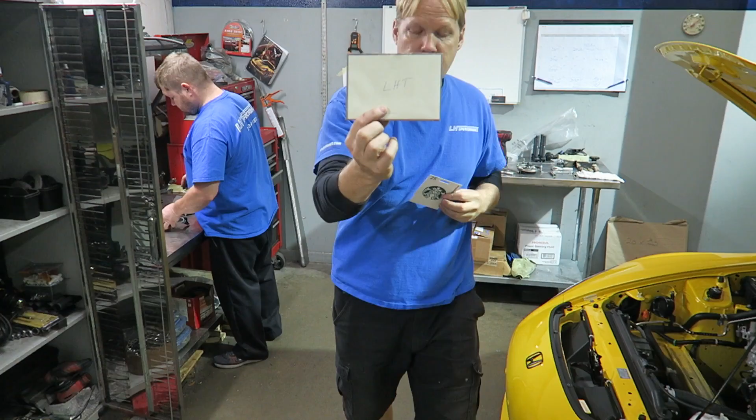Alright, so when Keith dropped off his car, he also dropped off this, which had this in it. Fantastic. George, you're going to be forced to drink a Starbucks coffee. Thank you, Keith.

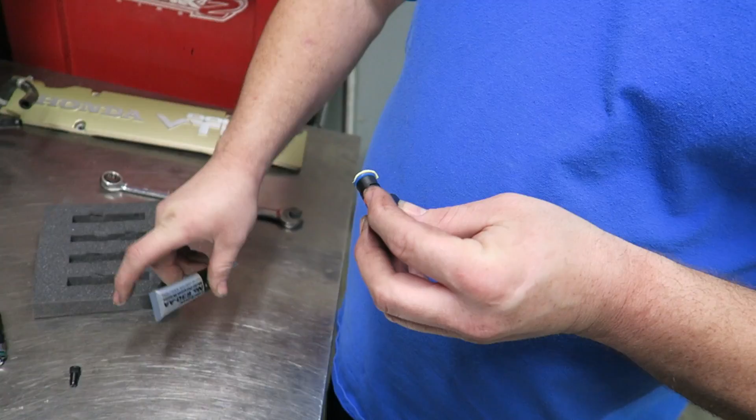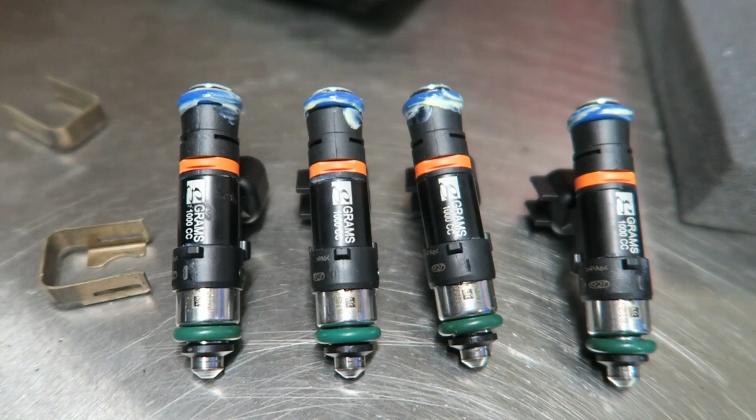Over on George's bench right now, a little bit of lube on the O-rings to make them go in nice and not scratch or kink or anything like that. This is the 06-and-up fuel rail. This is the S2000 CR, but most of the components are the same as the 06-and-up. This is a returnless system, we've talked about this before. Typically 420, 430 horsepower is all it supports before it starts becoming restrictive. These are the Grams 1000cc injectors we use on all of our kits. Great injectors, great idle, very easy to tune.

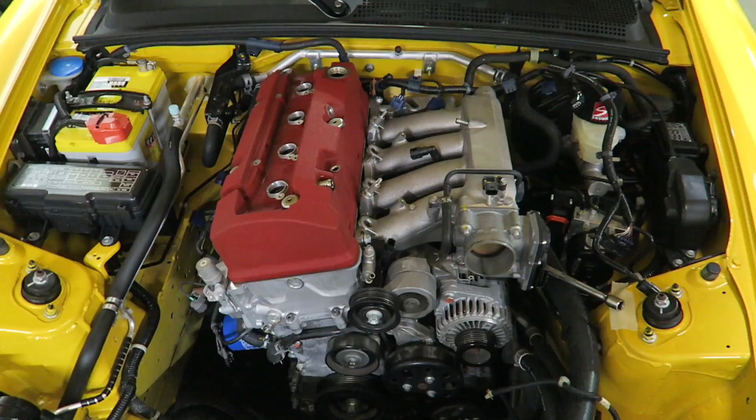So here we are at this point, still taking things apart. He's putting the injectors in the rail. This manifold is getting changed, he's actually getting one of our updated manifolds. It's the larger manifold, basically the plenum is about 35% larger. The runners are pretty much the same, except we ported them out, and then the entryways we opened up to make them larger. They should be back today.

He wanted it powder coated and wrinkle black, so when it comes in I'll go ahead and film that and show you some of the parts.

What are you writing? Prices. You booking people in? I'm trying, I'm really trying. So if you can't get a hold of us on the phone, it's because Esther's not answering it. See, it's always good to blame someone else. It's not my fault, she's trying.

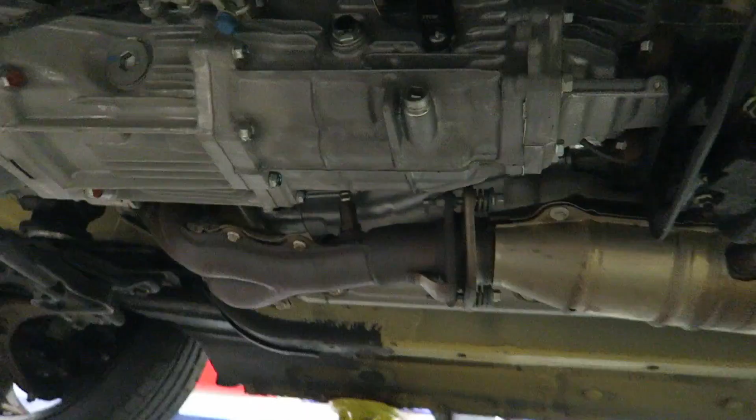She's booking people in. We're booking up pretty quick, but by having a schedule, that lets everybody's car come in and get worked on that day. We're not a shop where you drop it off outside and we work on it whenever, that doesn't happen. The car was actually driven all the way from Texas, so we've been doing the other little jobs while it cools down because it's actually fairly warm still.

But the transmission has to come off to do the clutch. He's opting for one of our flywheels too.

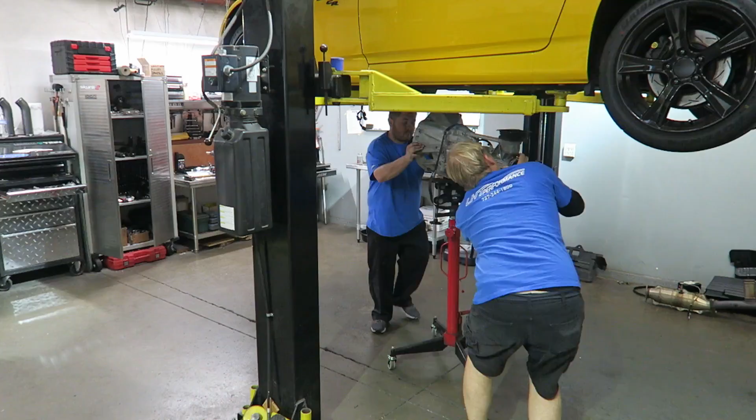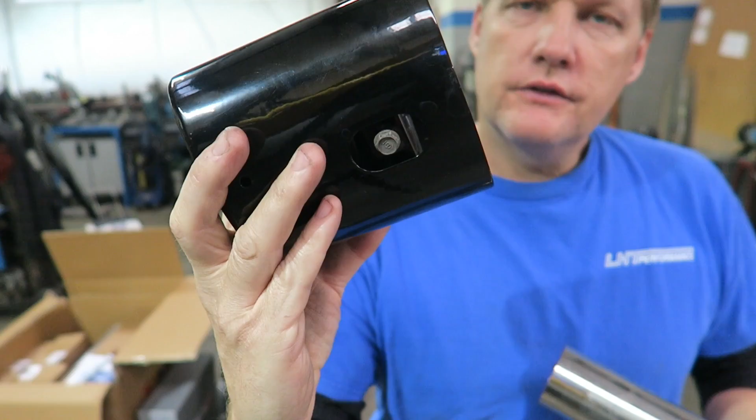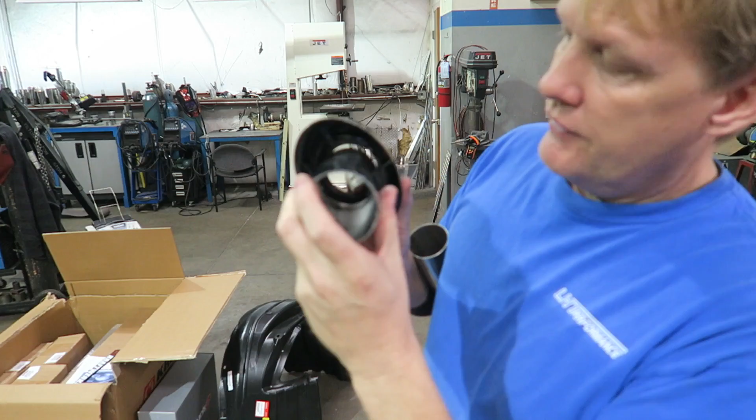So the CR has black exhaust tips and the customer really wants to keep these. We're doing our LHT twin loop muffler, and the way this clamps on is it slides into this area here, and then there's a little bolt that goes through that the exhaust has a tab the bolt goes through. Now this is 2.5 inch, and our exhaust is 2 3/4 into dual 2.5s, and 2.5s don't fit in there at all, it's not going to happen. This is our next size down, 2 1/4.

This is too small. We could weld a tab on there, but the problem is vibration, this tip would end up doing whatever it wants and it would be crooked, and then it would look goofy. You'd see a car going down the road and one tip's like this, one tip's like that. That ain't gonna happen. So what I'm gonna do is take the 2.5, cut it down. I'm actually gonna split it and then neck it down to the exact size, then weld up the seam. You're not gonna see it because it's inside this tip. But again, it's something the customer really wanted, so we're gonna try and make it happen for him.

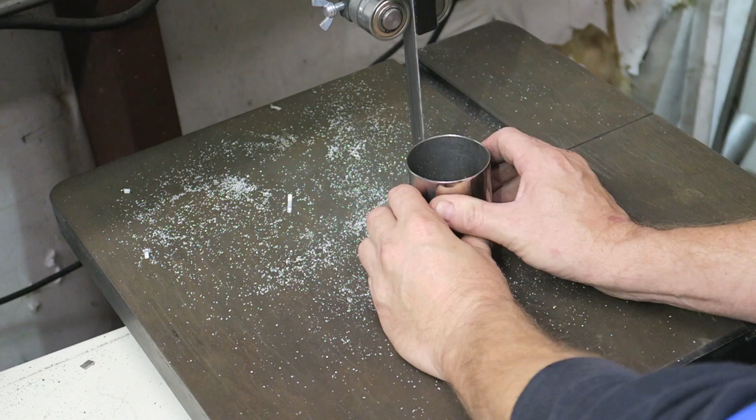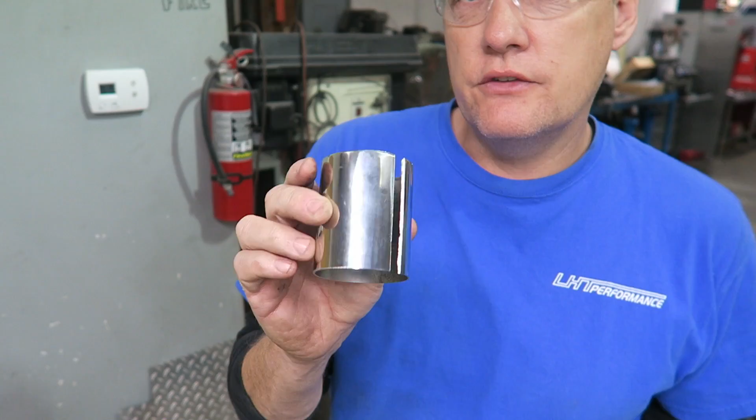So now, using a quick calculation with the pi equation, we took this much out of it. We're going to pinch that down in the vise. Hopefully it'll be round here by that.

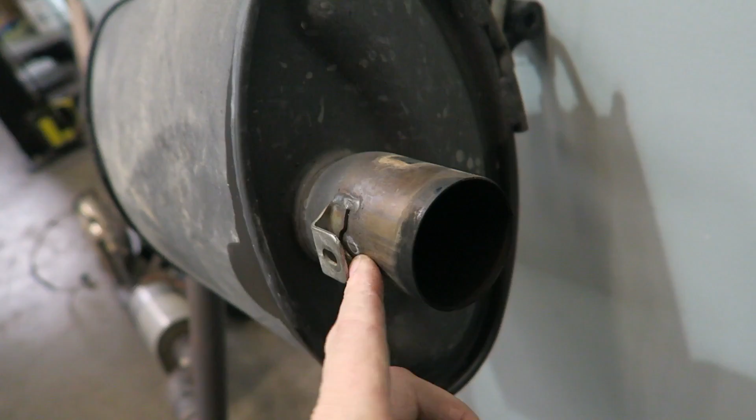Perfect. So this is the little tab that sits off where the muffler bolts to. The muffler slides over that, the bolt goes through here and attaches to a nut that's welded inside the tip. So basically we need to recreate one of those.

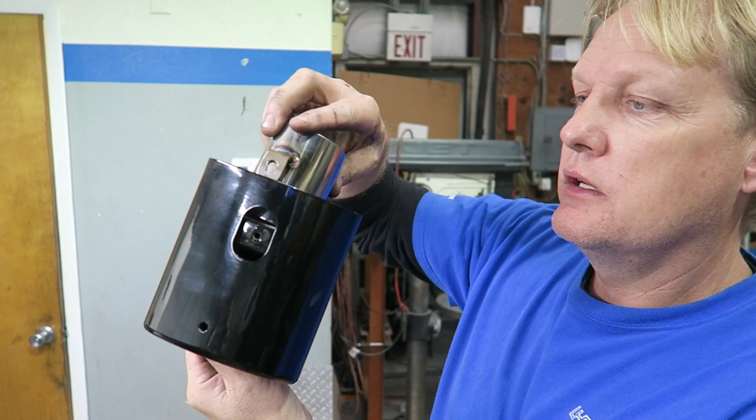There's a piece welded on, and I slotted it just like the Honda piece, so it has a little bit of wiggle room. This goes on, that slides in here, that fits on, and the bolt goes back in.

If you buy from us, we put this finish on it and also install the bearing, which makes it a little easier. If you buy our Clutch Masters clutch and flywheel combo, we put them together in one box and ship them for free, saving you a lot of hassle. You're ready to go with the right combination. That's the same combination we use on almost every single S2000 that leaves the shop.

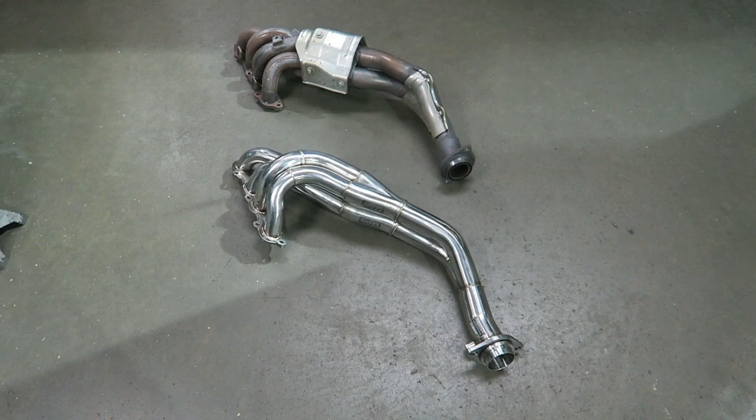You know, I thought about it - we have that digital fishing scale here. Why not weigh it? Maybe it's lighter than the factory one too. Let's get a before and after. We'll put this on too because this is going to be on there if you're running it.

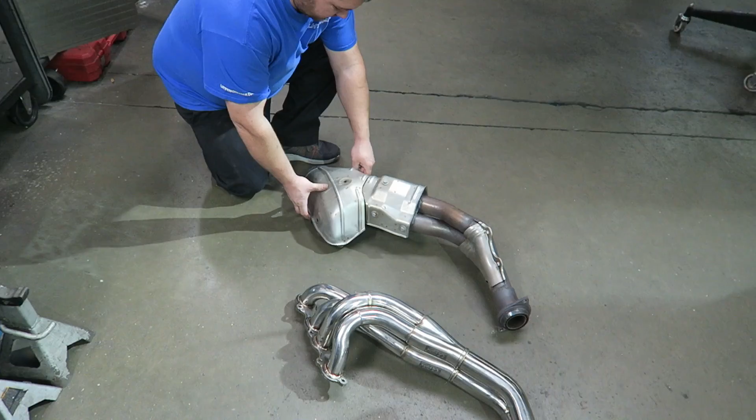That's true. All right, factory header in factory configuration. Weight test number one.

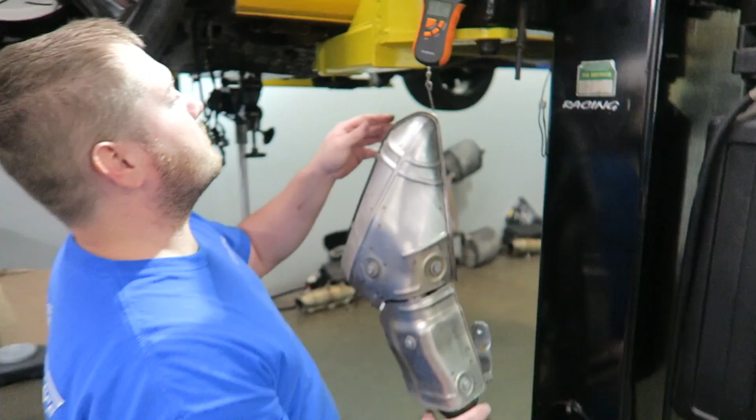Let's see what we got. What do we got, George? Still moving - we'll just call that 23 pounds 13 ounces. Yeah, 23, 13. All right, Skunk2 header.

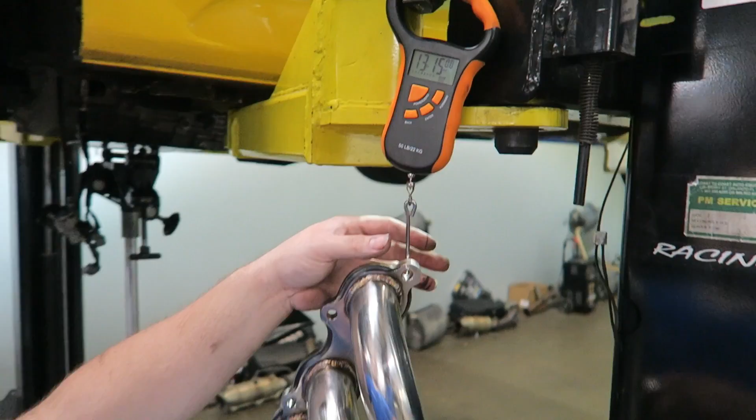Let's see where we are. What are we looking at? 13 pounds 15 ounces. Wow, look at that, I didn't expect that, did you? No. We were at 23, 13 and now 13 pounds - that's a 10 pound difference.

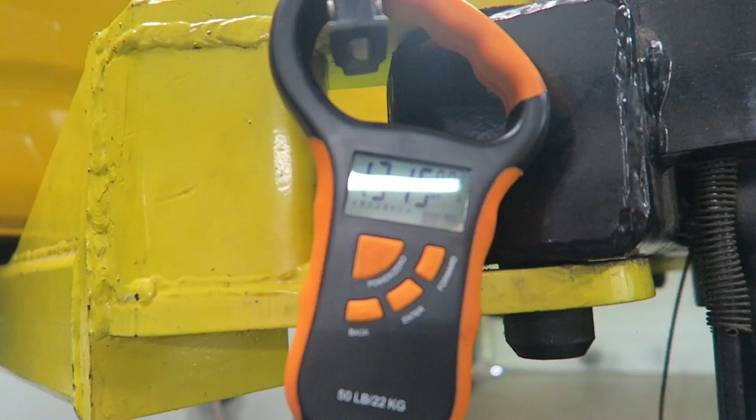Oh, he's got the red valve cover, factory. I've got everything pretty much off of there, ready to come off. And there's the black valve cover installed. I really prefer the black, especially on the yellow car - I don't really like the red and yellow together. But then again, every S2000 has a red valve cover, so why not change it up a little bit?

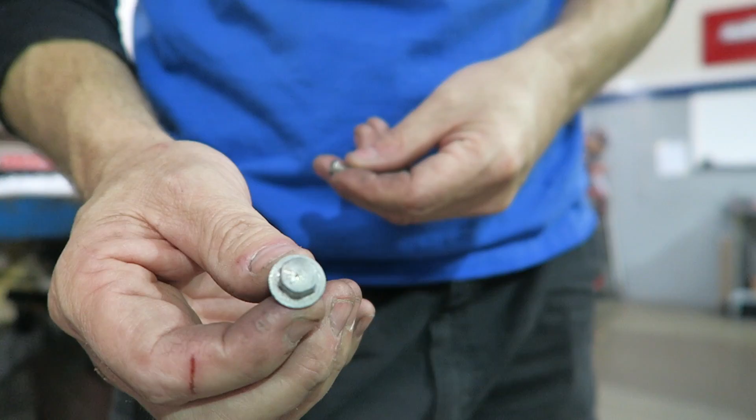Even though it's a low mileage car, these all get kind of corroded over time, so we're going to go ahead and replace it with these nice stainless button heads. And I'll put a 6mm washer under that so it looks nice.

Alright, I'll go ahead and turn Taylor Swift off, especially because I tagged her in the Swift Springs video and she never responded or liked it, so I'm not going to play her music on the video. I don't know why I tagged her - I typed in Swift Springs and her name came up and I was like, hey, never know.

Alright, so we're putting in a new serpentine belt. This car only has 27,000 miles and the serpentine belt is probably okay, but it's 10 plus years old. Like we said before, once the supercharger goes on this belt's a lot harder to replace, so why not put a brand new one on now?

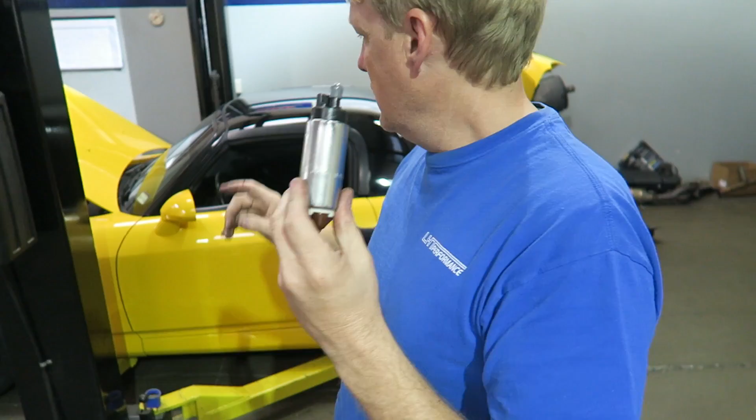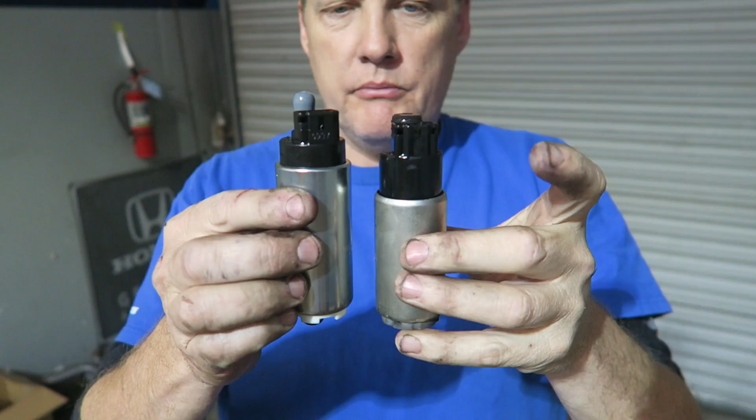The nice thing about a CR is it doesn't have any soft top area here or that plastic tray, so changing the fuel pump is a blast. This is the Walbro pump - see, it's a little bit longer, about 3/4 of an inch longer overall. A little bit of trimming.

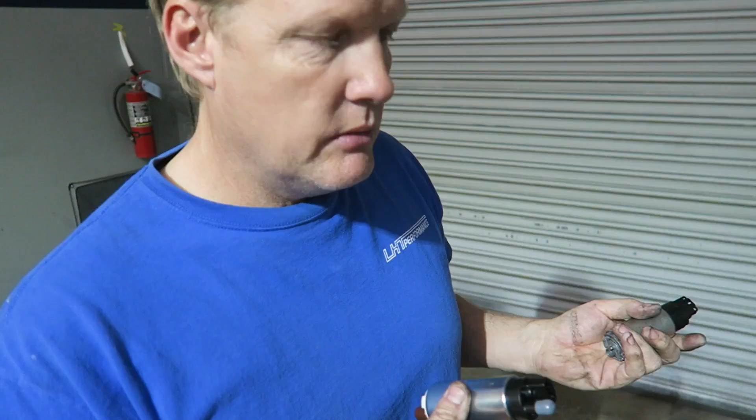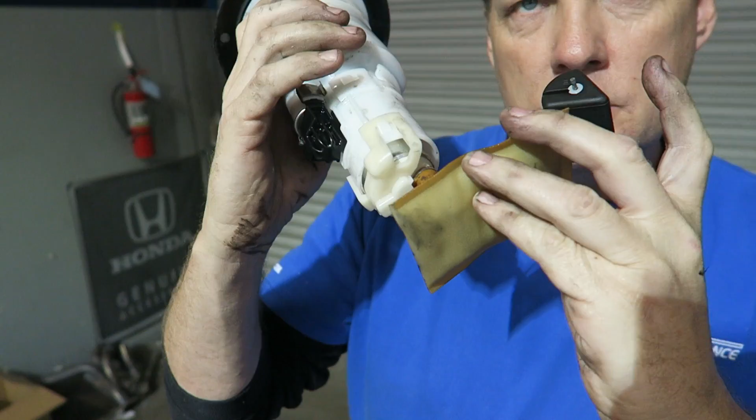I'm not going to go into too many details because it's kind of boring. A little bit of trimming and it'll go right back in that factory housing, giving you about 430, 440 horsepower worth of pumping pressure. And here we are, there's the pump installed - see, it fits right back in the factory housing.

Don't forget to plug this in. I'll tell you, one time I did put it in, did forget to do this, and it wasn't on a CR, it was one where I had to take the whole back apart. It wasn't much fun, especially turning the key, listening for the fuel pump, realizing I didn't hear it. Check this, check that, check the other. Yeah, gotta take it back apart.

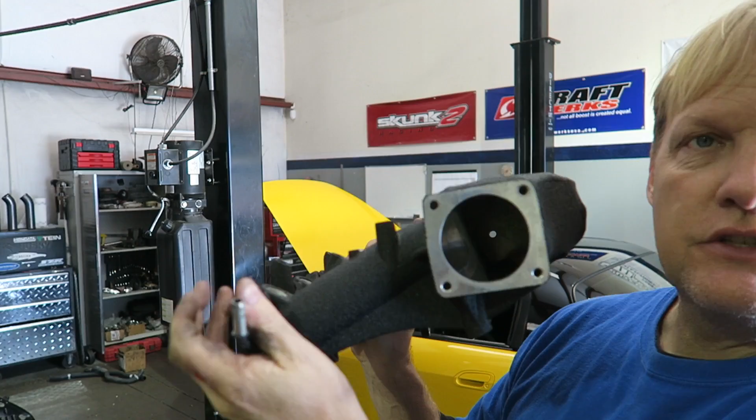Okay, so here's the manifold, just got it back from powder coating. We use AB Powder Coating - they were good enough to get this done exactly how we wanted it. Wrinkle black. This one has a 30% bigger plenum. Can't really see in this light, but it has our name on it, and some water on there from washing it. You see it's all ported out nicely and blended in there. I'll try to put some pictures up of the inside plenum before I put it all together - I've got some good still shots of that. So this flows quite a bit more than the factory one.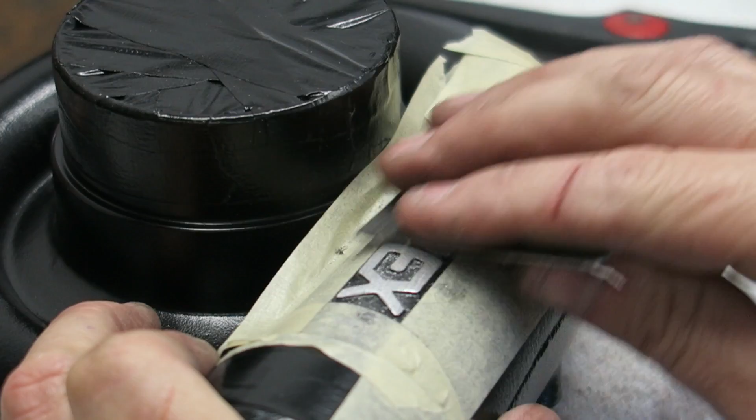So we just got the rest of our black parts back. You can see the piping is satin also. This is the cover - we ordered the black housing kit, and this is usually silver, but we had this done epoxy black, which is a satin. It looks very close to the satin on the blower.

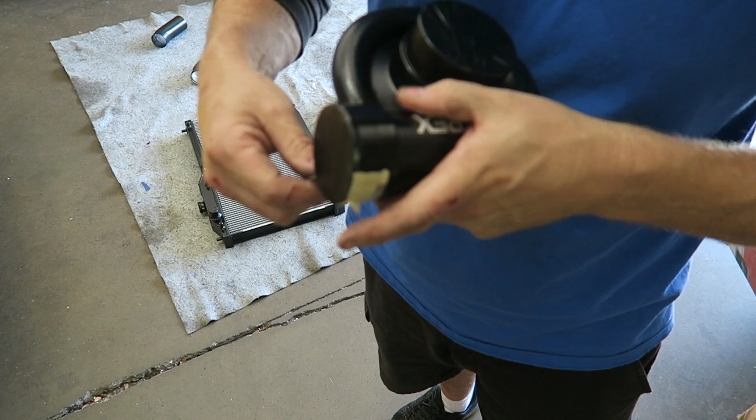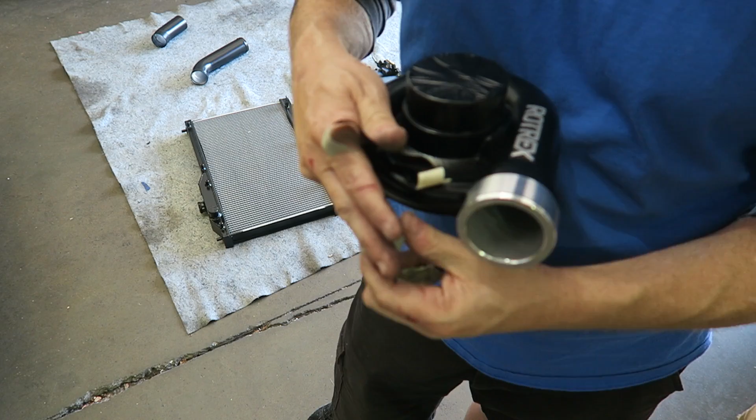One of the things I thought would be cool is to sand these letters because they're raised. I masked this up. If you want to know why I left this part aluminum - where the pipes attach, if you tighten those and crank them down, I didn't want them to damage the black finish anywhere. And I didn't want to leave this lip silver, because then when you look down it you'd see a silver part. So the pipe will come up here, the clamping is here, and this part will still look black. But I kind of like that lettering.

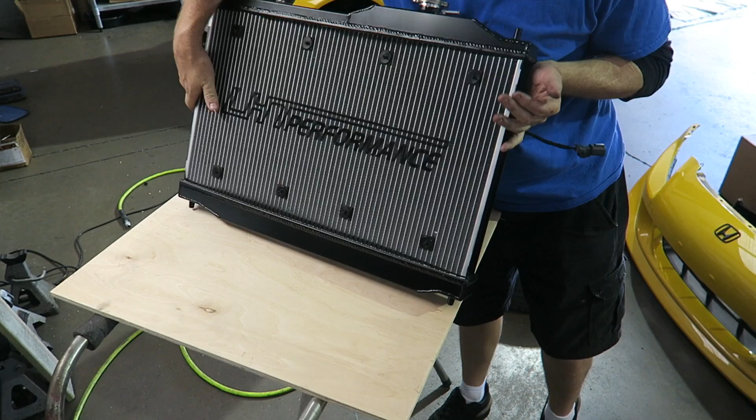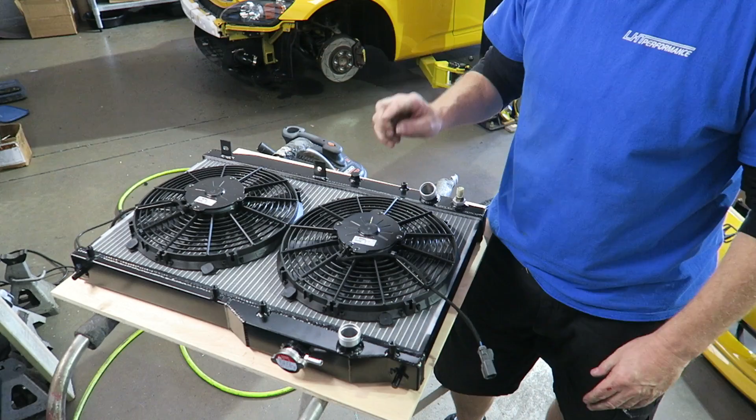It looks really cool. This is what the customer requested, so we did the end tanks black top and bottom. It's the LHT radiator, it has the LHT logo, and of course it runs the dual spal fans. We've got our satin black radiator in here.

Got Skunk2 radiator hoses. Now if anyone's installed radiator hoses on an S2000, I'm sure you know it'd be a little bit easier with the intake manifold off, right? So that's what I did.

So as well as getting the larger intake manifold, he's getting a throttle body. You might have seen on the car we did for New York, the 470 horsepower car - we take the factory S2000 throttle body and bore it out. We increased the size by 4 millimeters. There are a bunch of throttle bodies out there on the market, but I really like the OEM one. We have zero issues with this, basically making it larger with a larger plate. Everything else is 100% OEM. It's the way to go.

He's getting a different color though, so I'm going to show you that coming up.

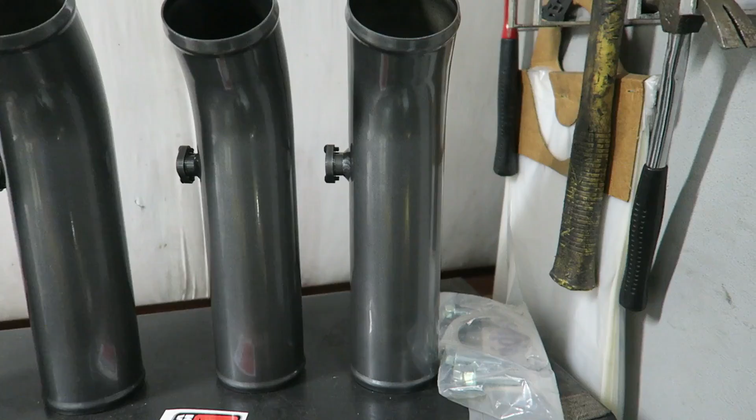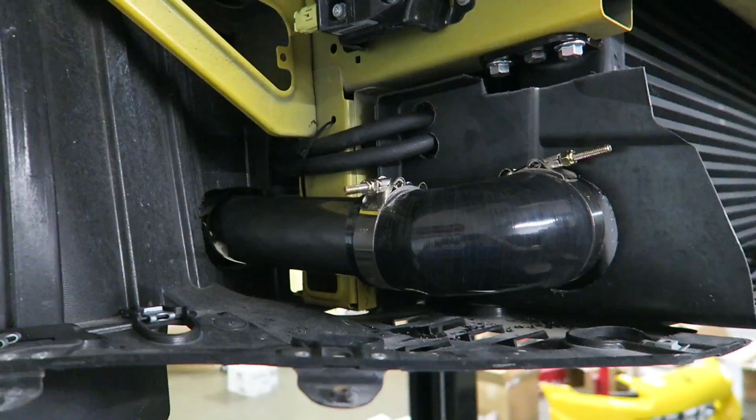So we've talked about these tubes before - we actually have a small collection of these building up. This comes out the side like we talked about. When you're looking at the tube this way, it sits there and comes out the side. Got the intercooler all in. The customer wanted T-bolt clamps down here.

So there they are. Everything's in, ready to start putting this bumper back on. There we go, got bolts for the future. Alright, so there are the new Allen bolts installed. I actually like the way that looks - what do you think? It just gives it a little bit of definition and doesn't make it look like it was all painted in one go. So Keith, I hope you like that.

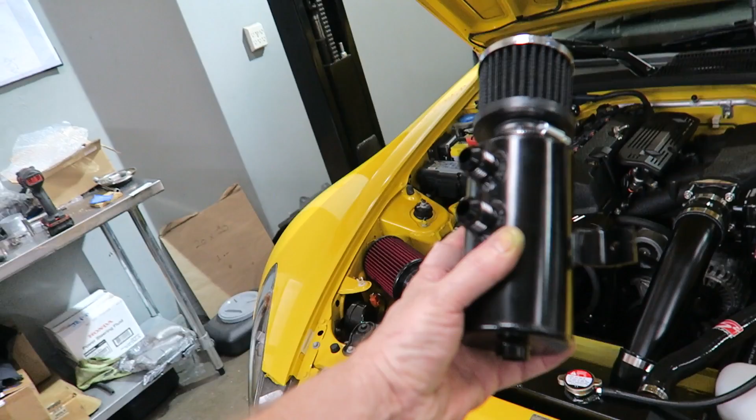The problem is trying to fit this in here. This is obviously the first area you would think of, but the problem is the height of that with the filter just isn't going to work - the hood ain't going to close. So what George came up with is, look, we have a big gaping hole right there that nothing goes in, and he's drawing this template here.

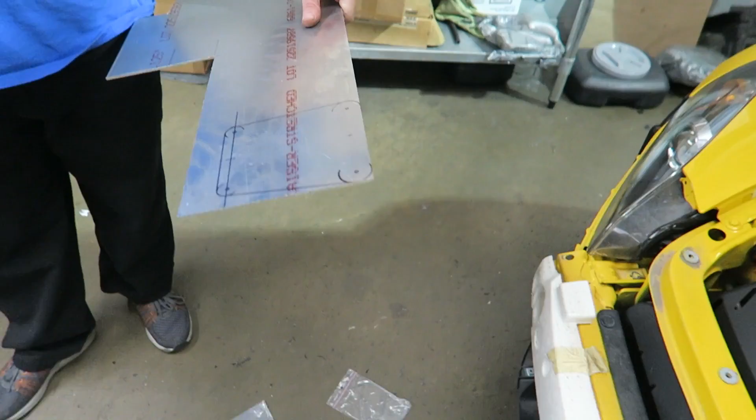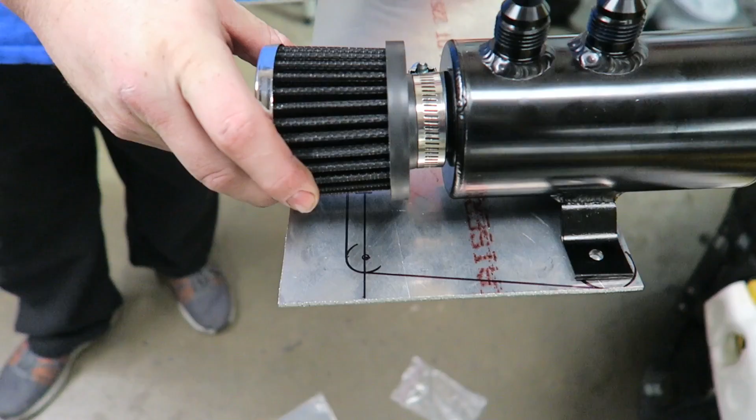So what he's going to do is bolt this to that aluminum, and then the aluminum is going to bolt to the 2 tabs on our radiator. Of course this is going to be black, so it'll disappear, but it's going to go to those 2 tabs right here and sit in that hole right about there.

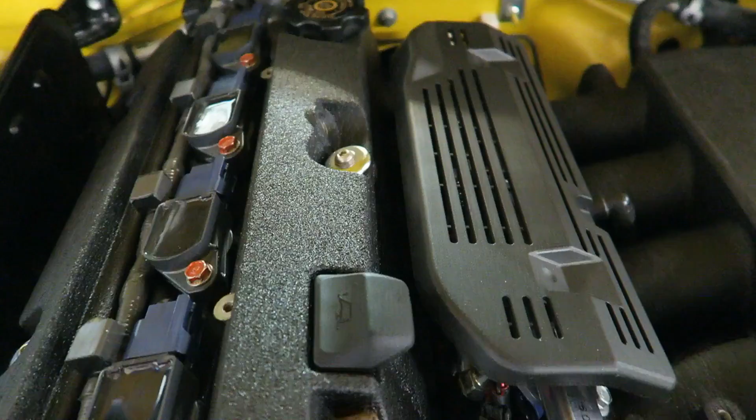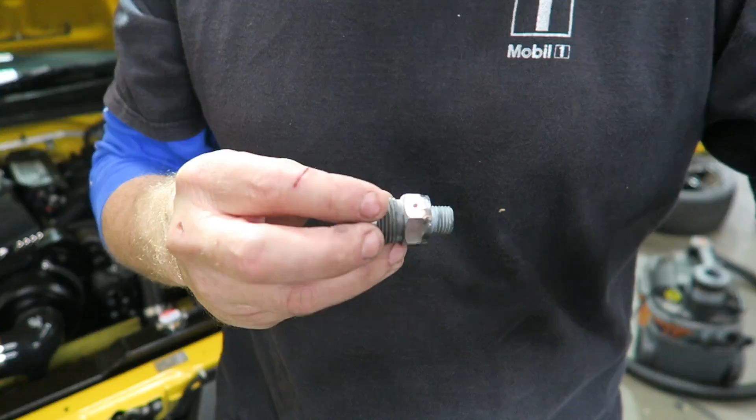So just remove the fitting out of here, what was a PCV right here. What I'm going to do is cut that hose end off and weld on a -10, and then we can use all AN fittings to his can. Alright, so basically cut the factory thread off and welded my -10 on. I know someone's going to comment, they make a piece that does that, here's the link, blah blah blah.

Guess what, I don't have that piece, and I have the ability to weld and cut and grind and whatever. Got to paint this black, and the problem I have is this head here is going to be hard to get a wrench in without scratching the valve cover, and then when I paint this black it's going to scratch. So I just came up with a fantastic idea.

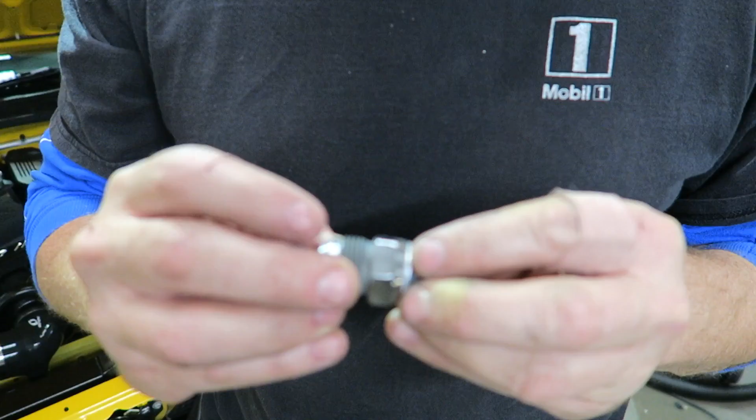So once the washer is on here, I figured out where this tightens up finger tight. I just made a little mark right here. I'm going to drill a little hole in there, not too far through that it goes through, something that I can put an Allen bolt or an Allen key in there nice and tight and use it as a wrench and tighten it, and then that hole will point towards the back of the car. So you won't see it, but it's not going to leak.

What an ingenious idea, do you think? No? You know what? I don't care. I'm going to do it anyway.

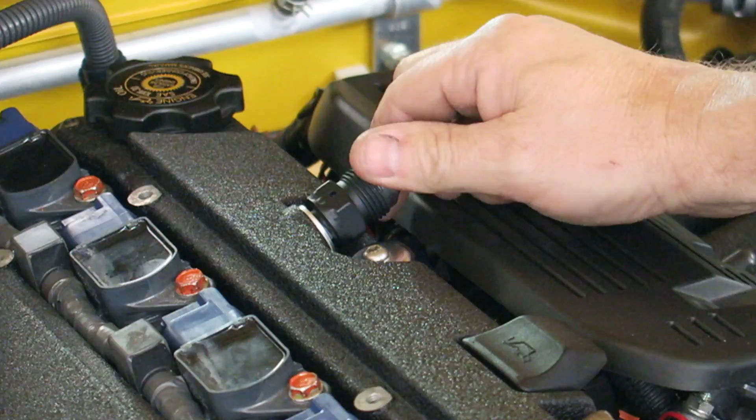There's my little hole right there after painting. It stops right there. Put my little key in there. That way I can tighten it. Super creative scene coming up.

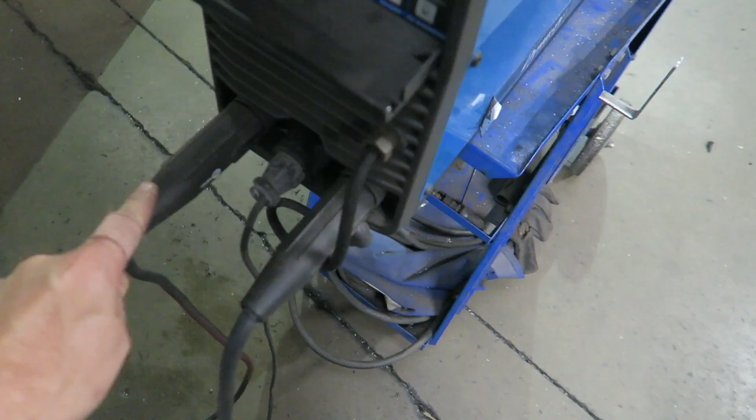Past the welder and the bottle. We use Miller products. In fact, we've got 3 Miller welders here. Now, if we could get rid of all these cables, it's like the worst thing about welding. Whenever we move one of our machines, 3 cables to drag around. If they could make each one of these Bluetooth, that would be fantastic.

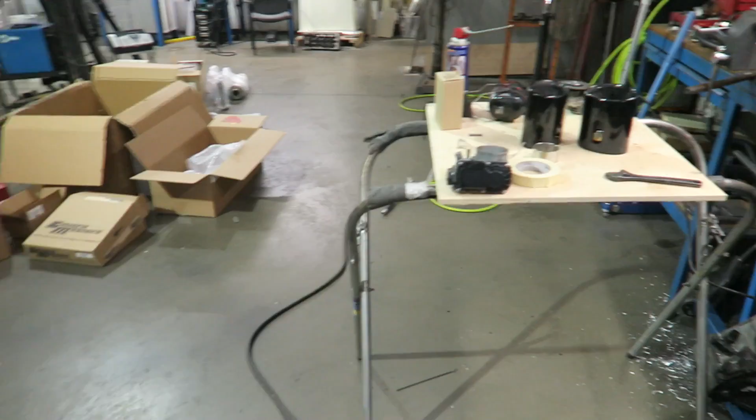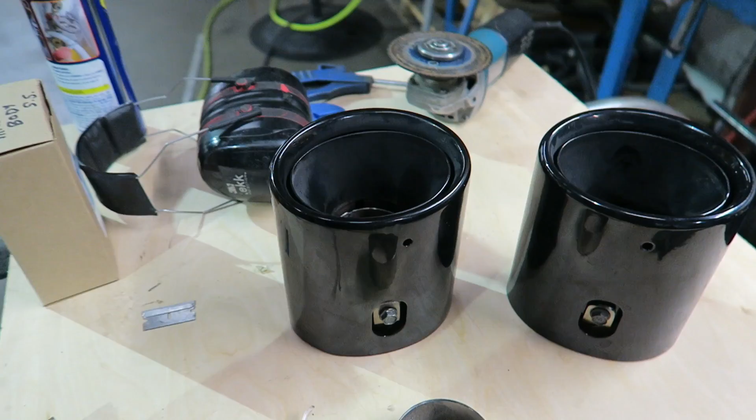So we're modifying our mufflers to accept the factory tips. I showed you earlier how we're using the factory tips, which are here, and this piece that goes in there, I showed you was making that. We're making it so that these will sit on our muffler and stick out just the right amount. We're going to actually set them back a little more than the factory - I mean make them stick out a little more, because they tend to disappear under the bumper. I kind of like it where, when you look at it from the top here, you see about this much of the tip sticking out, where the factory one tends to be like this.

Okay guys, so we had the coldest night of the year. Woke up this morning and it was 31. I'm sure to some of you guys that live up north, 31 is not that big of a deal, but to those people in Florida, that is pretty cold. Luckily we have heat. This is the temperature in the shop right now. It's 52. Put the heat on, let's get up to 68, then we can feel like we know what we're doing. Right now my hands are cold, feet are cold. The S2000's cold. An S2000 CR was never meant to be sitting in 52 degree temperatures.

So we're gonna let it warm up. George isn't here yet, I'm the first one here. I put the heat on, put the heat on in Esther's office, so you know what chicks are like - unless it's within 1 degree, they're either hot or cold. So kicking on all the big lights, we'll be fully functional in about 10 degrees.

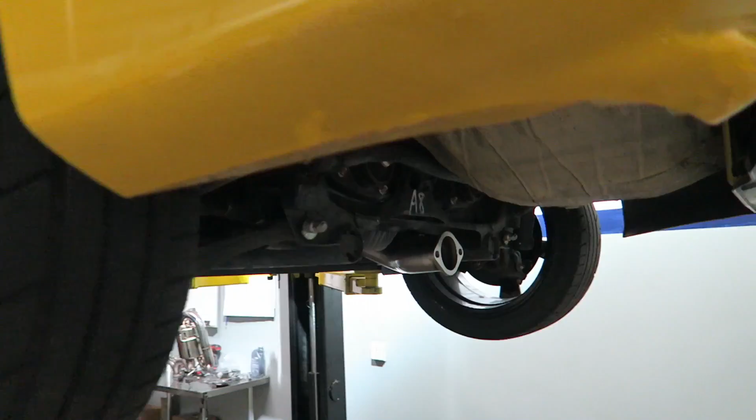He wanted the back section black. And what's weird about these is, this throws us off - they always have this little plastic piece just on the passenger side. So when we're centering the tips here, at first glance, it looks like you're closer here because of this. But then when you look at the gap here, it's correct. So what we do is we try and visually center them. We don't measure, but we take this into reference. So as you look at this, it looks centered in that pocket.

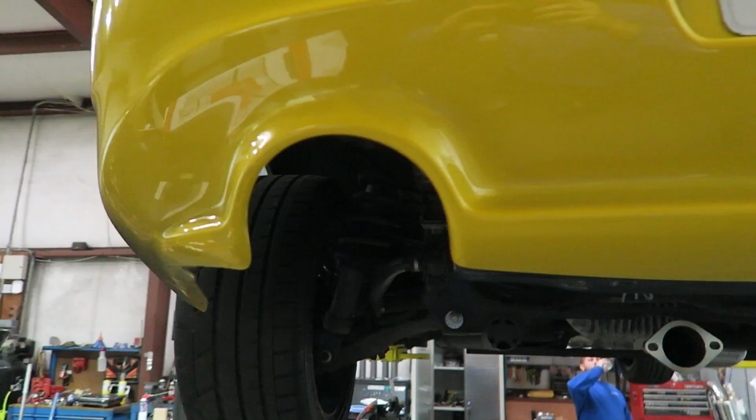Yeah, that's good to me. Yeah, it's a shame that stainless is going to go away.

Let me show you what it looks like. You see what I mean about this plastic piece here? It actually throws you off because that black sticks out, makes it look like that gap is smaller than what it is. But when you look at the overall arch of the bumper, it looks good. So we're going to take it off, send this out. The mufflers are getting done black, and then the tips will be put back on.

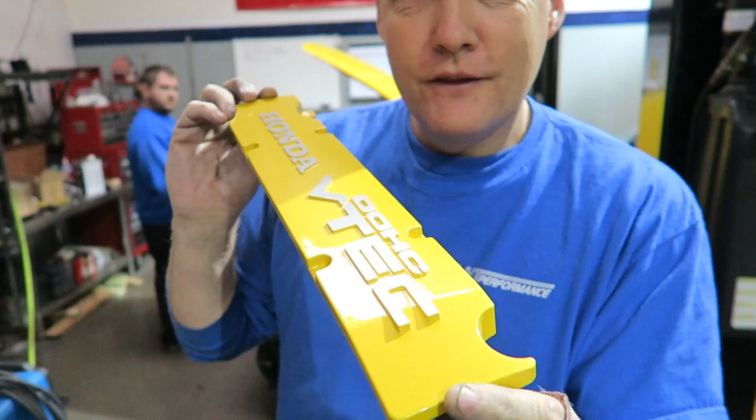I don't even need to tell you what this is. It's refinished in Rio Yellow Pearl, and I redid the letters. I know you were asking about doing the letters black. Trying to get those perfectly black and not make the letters go crooked is going to be really tough. I like it like this, so hope you like it.

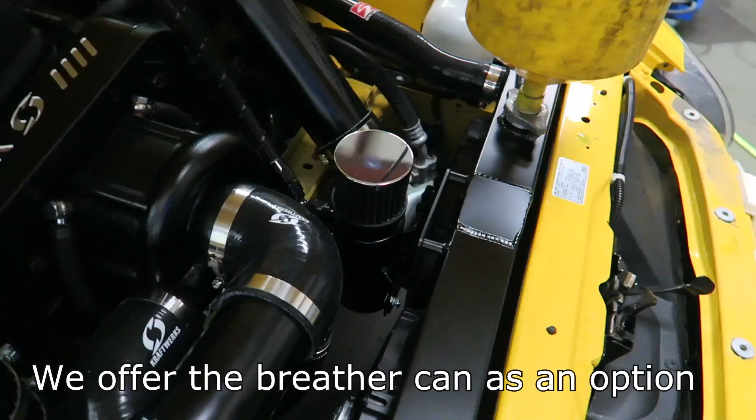If you don't, you can refinish the letters. But alright, this is how it's looking. It's almost put together. There's the breather can, showed you that. Those, of course, we did black lines.

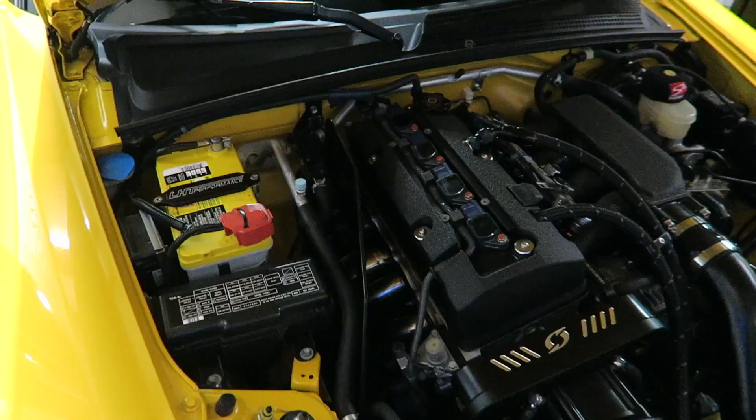Something else, a little bit of LHT TLC. There's our battery tie down, but we decided - this was something we used to do back in the old days, but it was very time consuming - we did the letters yellow filled. So our battery master cylinder brace. It's not a battery cylinder brace, is it?

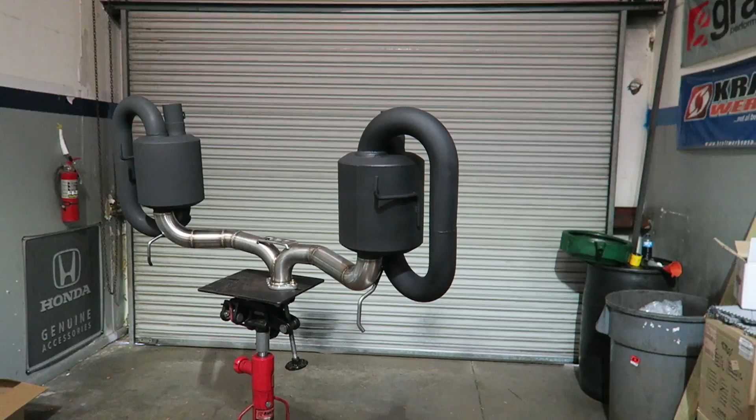Alright, so look what we have here. There's our ceramic coated exhaust now. The mufflers are ceramic coated black. I actually kind of like it. The tips have to go on. It's kind of cool, it's like a satin finish.

Used to it being this cold in here. It's 61 now, it dropped. Can't really tell by the graph, but it's about 12.4, 12.5.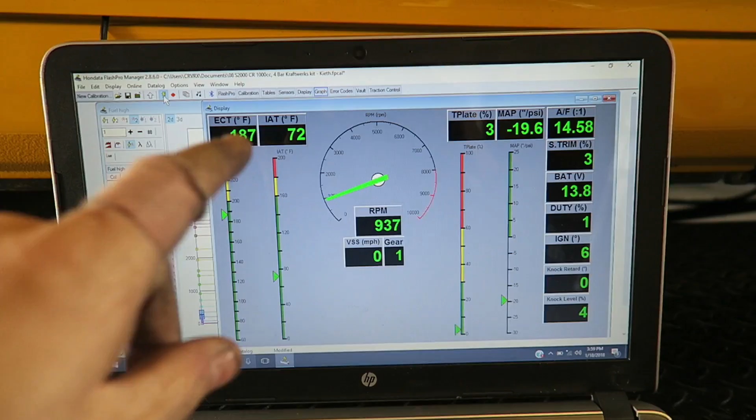Right here, 12.7. We shut it down, so we're uploading. Added a little bit of fuel. Gonna run it again. Always try and stay on the safe side. Look at this, we're not used to this temperature so low. It's usually in the 90s. Wow, look at that.

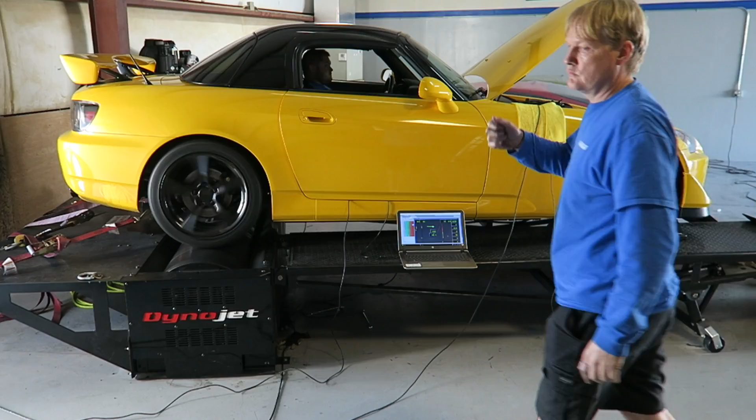Alright, so we are all done. We are freezing cold, my hands are cold. I need a heater for my laptop to type.

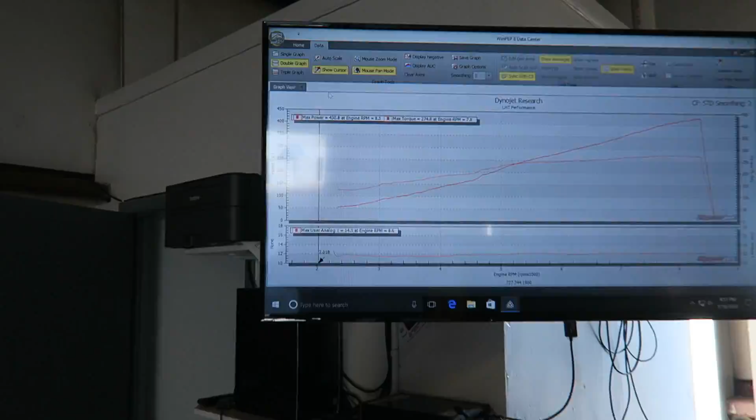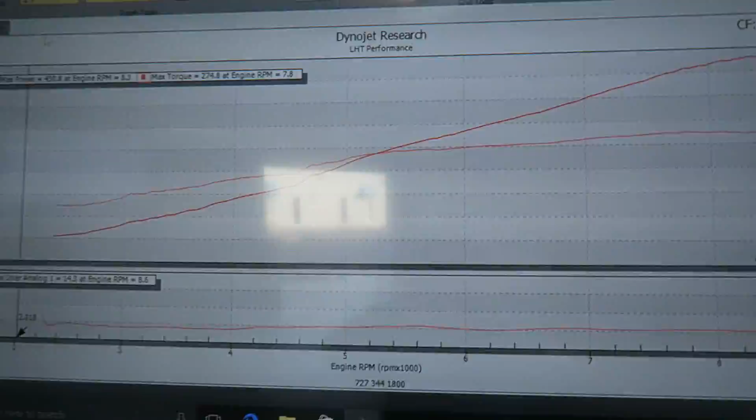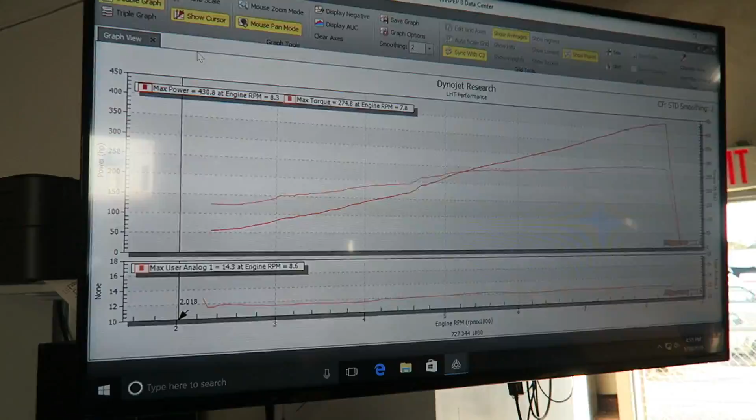Final number 430, 274. Only revving it to 82 because right at the top we're getting to a point where we're running out of fuel. I'm up high on my duty cycle due to this having the returnless system. Typically 420, 430 is really where I've found the limit of where I like to tune. It's going to need a return system to go any further. Usually we take these to 84, 85, so it's making more horsepower at 82. I'll see if I can find a graph and compare it to show you.

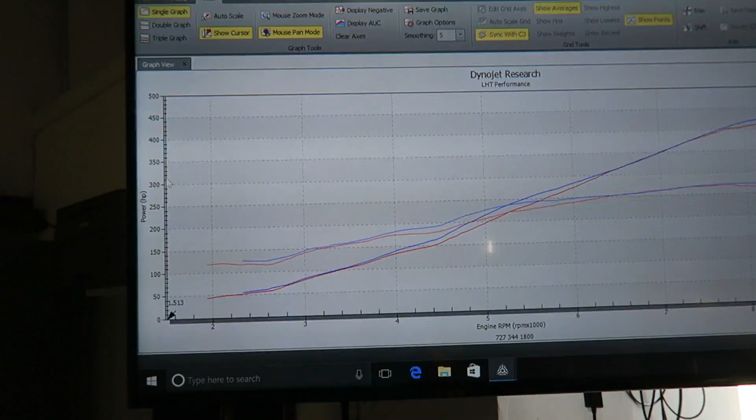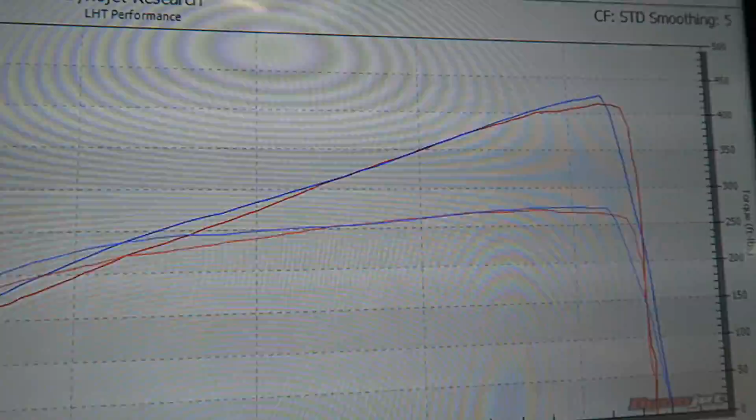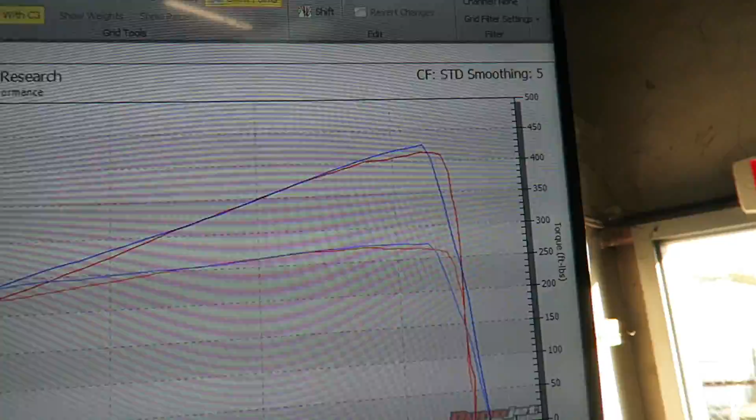Alright, so I found pretty much the exact same setup. This is a 2008. It was a little warmer when we did this car, but it kind of just gives you an idea. We're not doing the exact same car, so we're not putting scientific proof on this manifold, but the blue line is this car with the manifold, and it looks like it's picked up all the way through the mid-range. It kind of stays the same there and picks up. It's about 13 and 14 horsepower up top, and we're not revving it as far. We're revving it to 82, where typically we rev these cars to 84, so I think the gains actually would be higher. If we was to take it to 84, I think it would be a solid 20 gain there, but that's pretty good. Blue line is the manifold and throttle body.

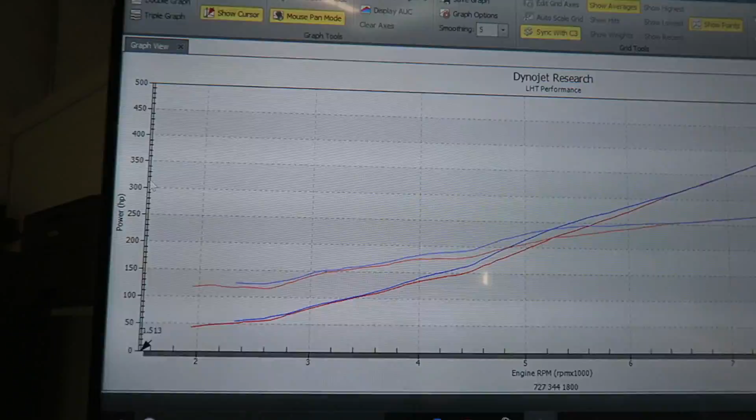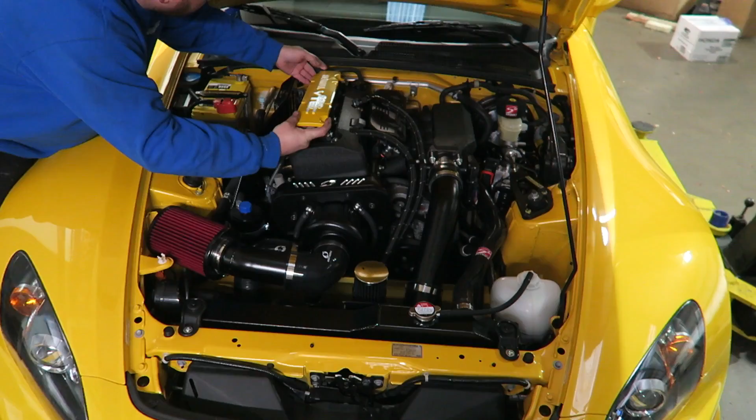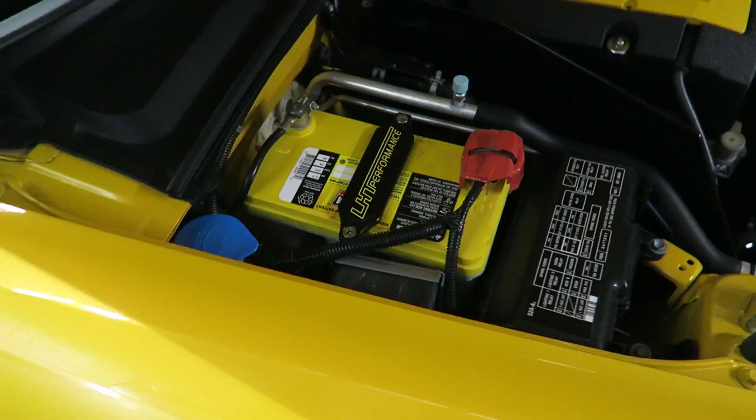The engine bay looks so good right now. That definitely brings the yellow in. See the master cylinder brace now? It's in, it's got the yellow letters, the yellow there. Oh, the yellow battery even matches, and the LHT battery tie, which is the yellow inlay. So that was good.